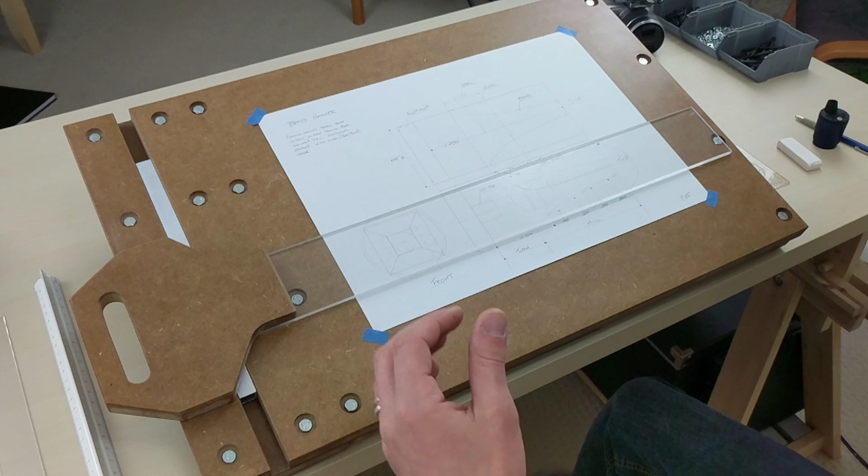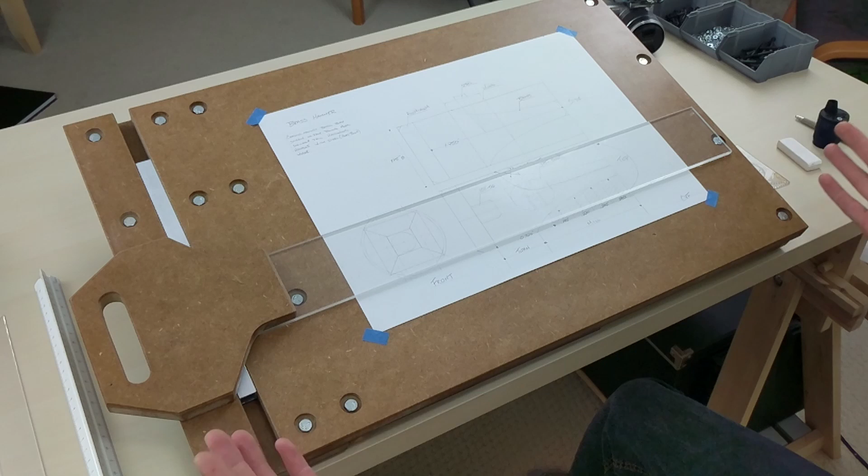What I wanted was a drafting table. I initially looked at buying or building a giant one and realized I don't need a giant one. I need a little portable one. I only draw on 11 by 17 paper or smaller. So something tiny would work great. And the commercial options I found I just wasn't happy with. Either they're very expensive or they were very cheap, both having their pros and cons. I figured I could build a fairly inexpensive material-wise drafting table and build it fairly easily, and then still have something that I'm happy with and that looks nice, in my opinion anyways.

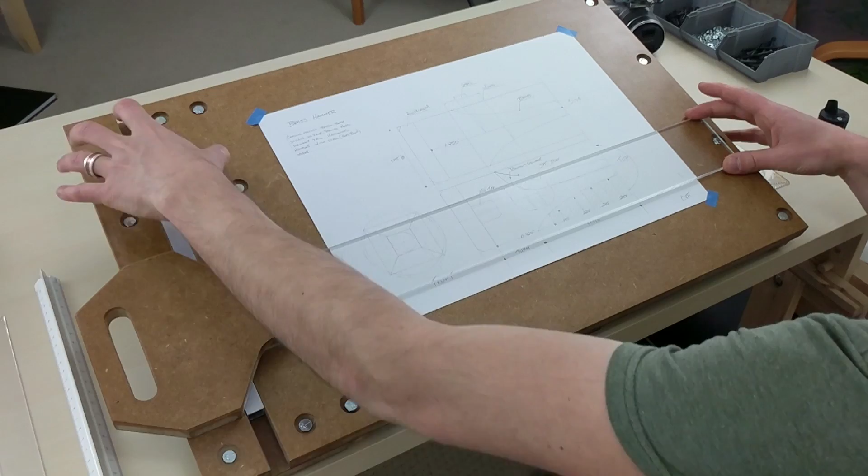So what I came up with was this table. It's a 3/4 inch MDF. I think I used a 2 foot by 4 foot piece. It uses bolts and some knockdown hardware like steel cross dowels for all the connections, some scrap aluminum, and a piece of scrap acrylic I had kicking around. And that works to give you a nice parallel rule. It's a nice registered adjustable slide so you can get everything nice and square. And it's easily removable, so if you wanted to run it vertically, you can run it that way as well.

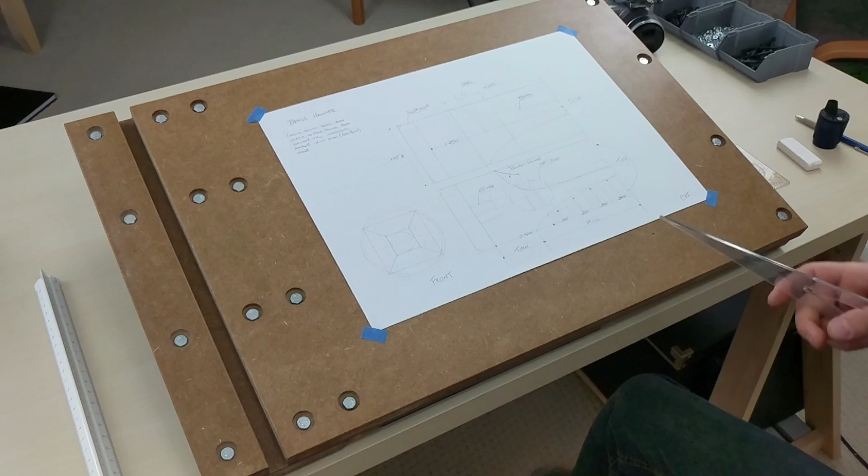I put that handhold in it there, not only for moving it about, but also for if you wanted to thread a clamp through and let's say clamp it at one position, if you're running a set of lines or something like that, you wanted to keep everything squared away. Or you can take the whole unit off and not even worry about it, and just sketch freehand on a table that's nice and inclined towards you for making drawing nice.

The top of this unit I just did with a polyurethane. I used a satin polyurethane. I put about 2 or 3 coats on, sanding between coats, and that gave it a super smooth finish, which is quite nice to draw on. And it's just soft enough that it'll take the point of a compass and it won't skate around on you, and then it won't nick the table up when you repeatedly use it.

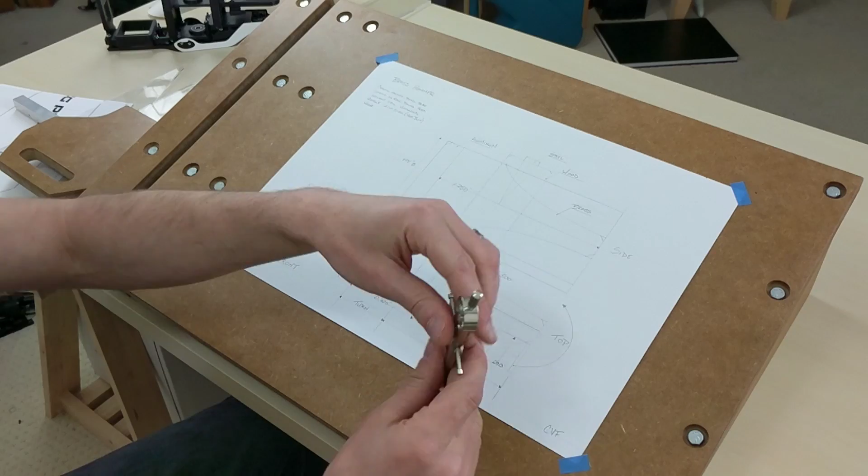I mean, I guess if you used it enough, I don't know how many years or decades that would take to mar up the table, but it would just be another coat of polyurethane, or worst come to worst, you take the whole tabletop off and replace it. But 20, 30 bucks for a sheet of MDF, build a lot of these. I think this one was built out of a 2 foot by 4 foot section. I think I still had extra left over, so. Nothing too complicated, like I said, a couple angles.

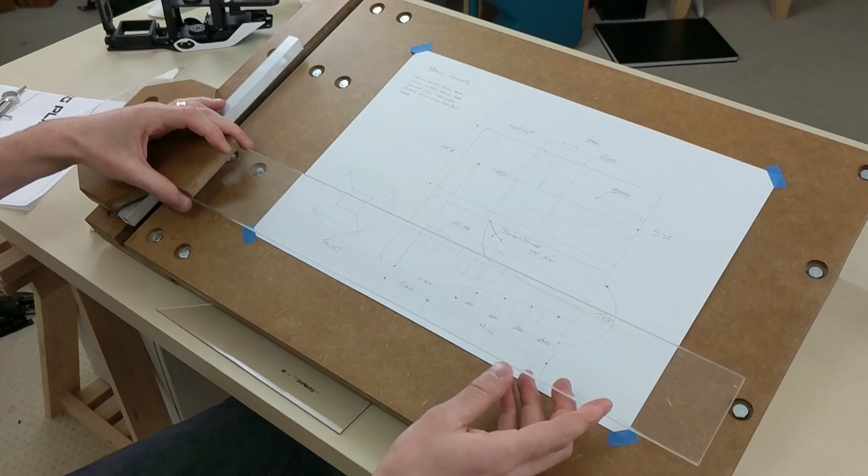The one thing I'm really happy with though is the way I've kind of double constrained the parallel rule. These holes are all oversized so that I like it nice and loose so that I can move it quickly with one hand and sketch with my other hand. You could just as easily tighten this up if you like it nice and snug and draw with both hands.

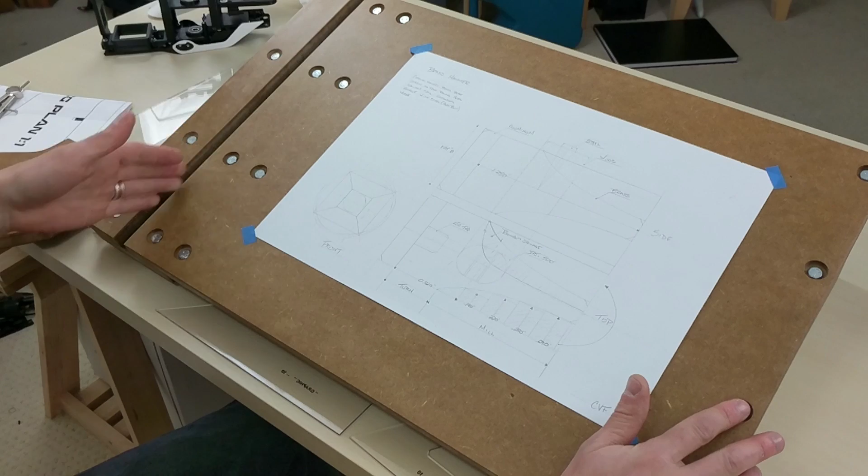All the plans for these, I drew them up in CAD and I designed them in a way that anybody with basic hand tools could make it. Like I said, I made this one with a table saw and a drill press. You could just as easily make it with a Skil saw and a drill press, as long as you can get one reference side relatively square. I mean, you could even go to the home center and get them to cut this one piece for you square on a panel saw or whatever they use. And then build the rest with just simple hand tools. And you'd have a nice little drawing table, take you a weekend and cost you 20, 30 bucks in parts.

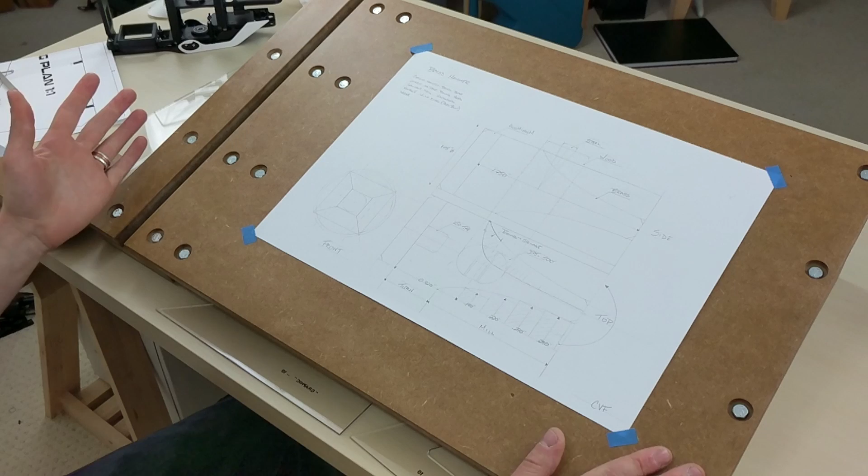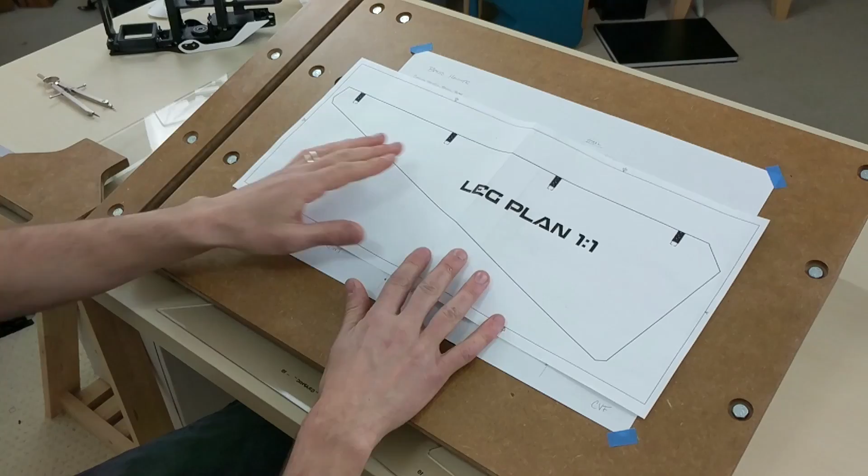This one specifically is 6 pages, full color, fully documented, and it also includes one-to-one printouts, like this one. This one specifically of the leg, because these 90s are easy to get, but some of these other angles, you don't want to have to draw them out and measure them and then get the layout position. You just print one of these out. This prints on 2 pieces of 8.5 by 11, so standard printer paper. The text is overlapped, so you can just overlap them, tape them, or glue them together. Stick them on whatever you want to cut it out of, and chop away.

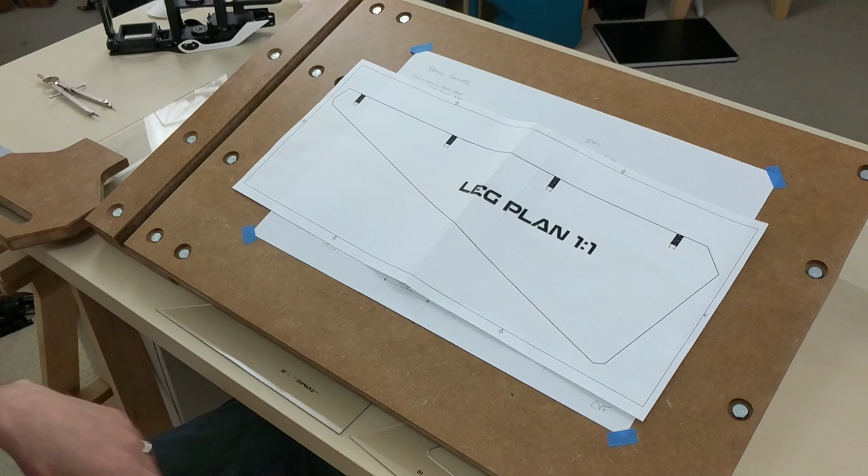So that's the premise of it. Anything more I say, I'm just going to start rambling about drafting, so we'll cut it there.